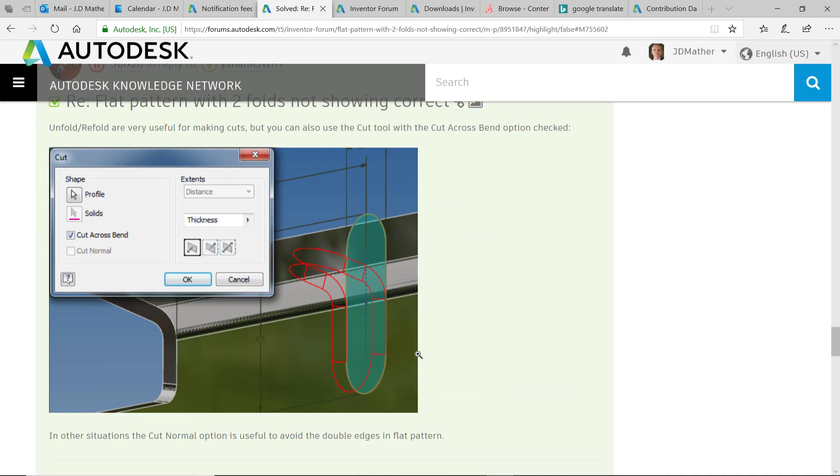In this video, a customer reports a problem with a flat pattern not showing correctly. I'll go through and analyze the geometry and suggest perhaps a better technique for doing this.

So here is the original part file. I'm going to go and look at the first sketch. And I see from the first sketch that it was started out as a flat part and then folded up.

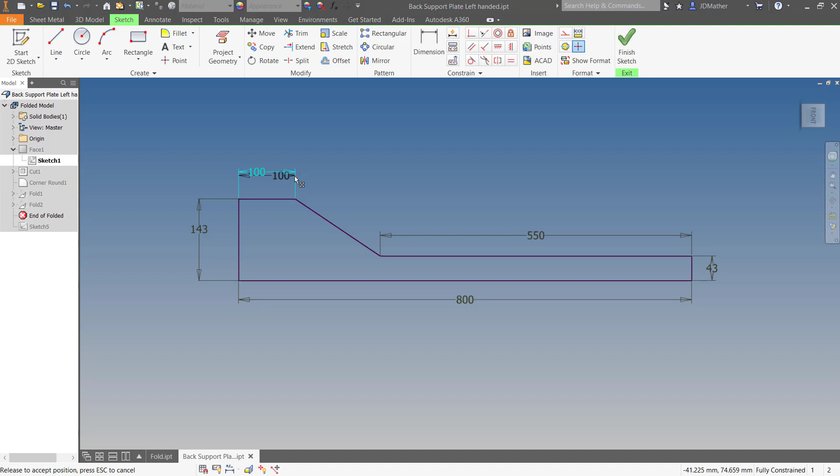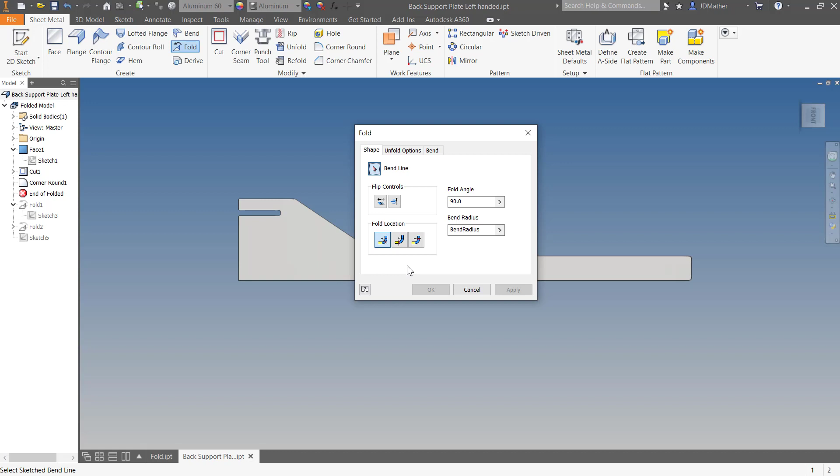I'm going to suggest that any time a beginner is tempted to use the fold command, the dialog box should actually come up and say, are you sure you want to do this? Have you checked with an expert to make sure that this is the best way to do it? Fold should be very, very rarely used. There are some cases where you would use fold, but I would say it should be a very rare occurrence

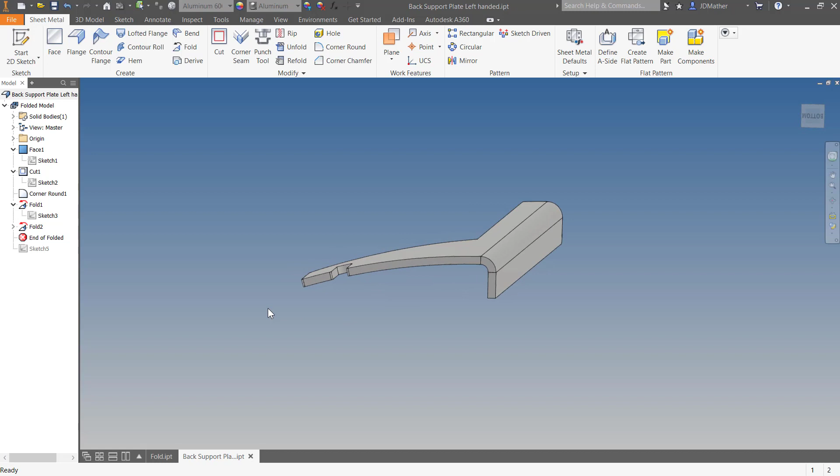And so this was folded 90 degrees, and then this was folded with some arc radius, which we'll look at in a minute. And then I created a sketch on the end of this part, and we'll look at that sketch.

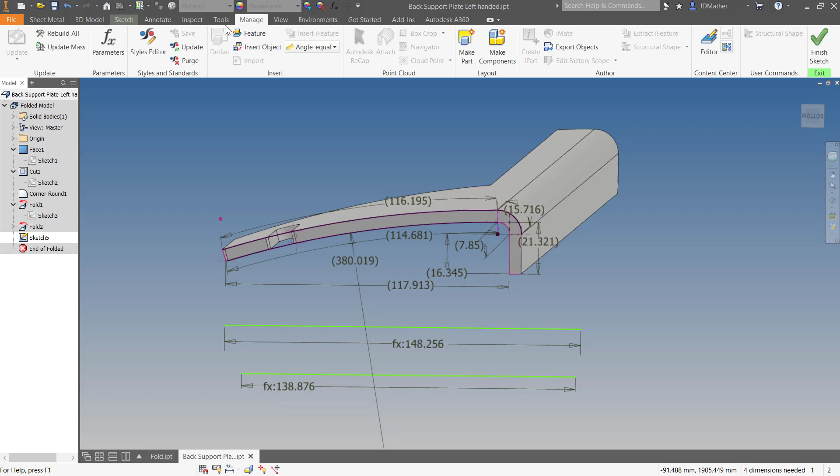So let's increase the number of decimal places out. I'm going to go to the Manage tab, or Tools, go to Document Settings, go to Units, and increase the number of units way out. We might do that on angles too.

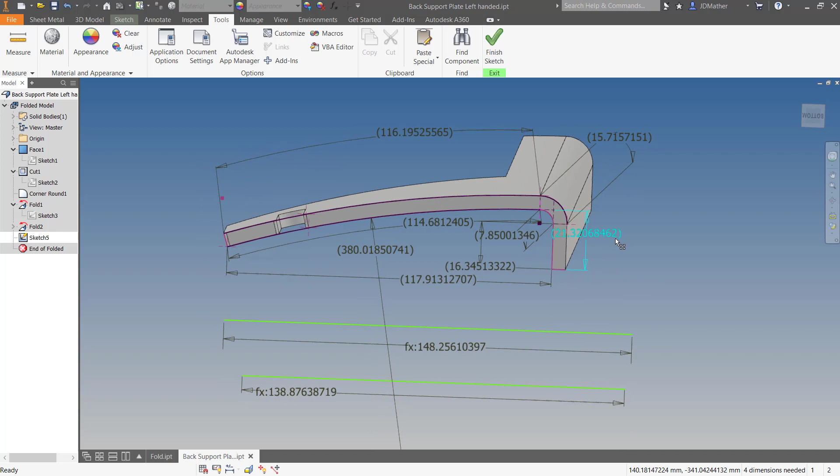If I look at these numbers, if I'm working in inspection and I have to start inspecting this part, none of these numbers make logical sense to me.

Now sometimes what I'll do is I'll check in both inch units and metric units to see if maybe it's just a matter of conversion from metric to, or from inch to metric.

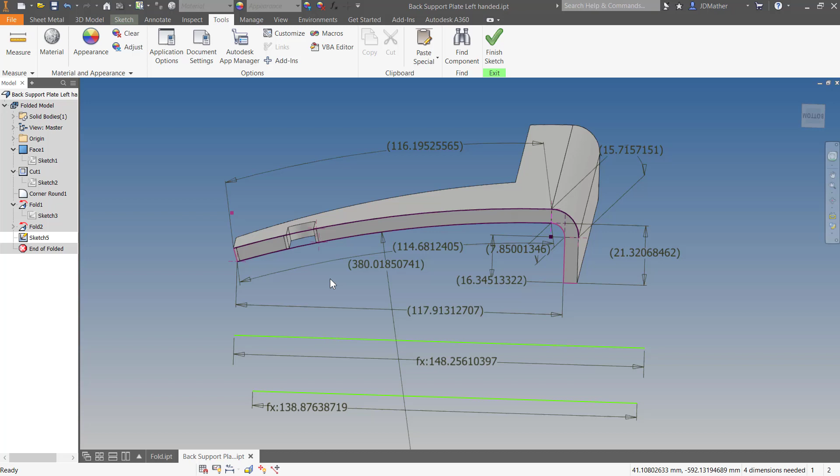But for the height of this vertical piece right here, is the design specification, would the inspector inspect it from here to here, or from here up to the implied intersection of this line and this line, or this arc and this line, up to here? So where is it inspected to?

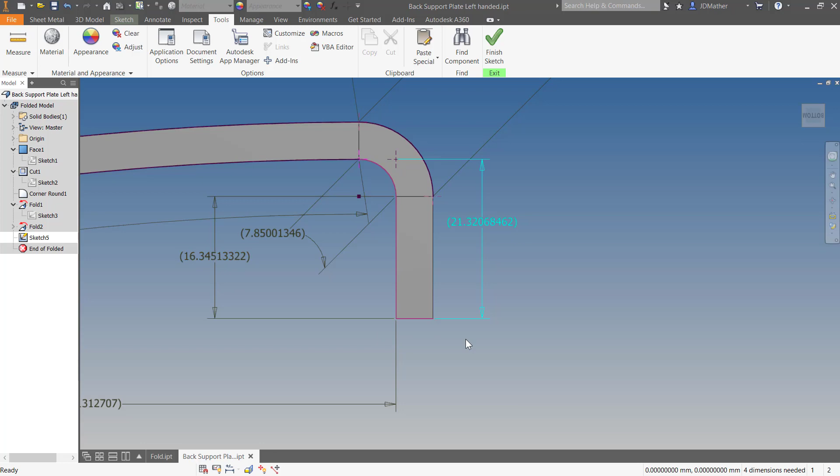Now what is the critical dimension? I don't think you can manufacture something out to 8 decimal places, so I would expect it to be something like 16.34 or 16.35 instead of going all the way out here like this.

And then I would expect that this point right here was dimensioned from here, or over here, or this point up here, or the midpoint here, something over here to tell me where this curve should end. And I wouldn't expect it to be a really oddball, strange number like that.

Now the original part was something like 143 millimeters wide. I took, let's just double click on this. So I added up the arc length of this dimension. Actually, I think this one is up here.

The arc length of this dimension, arc length of that dimension, and then this height from here to here, and I get 148. So that's the length of the curve along there.

And then I did the same thing on the inside of the curve. So the 143 would be somewhere in between here and here along there. But how do you inspect that? And what purpose does it serve? You want this thing to fit in an assembly.

So let's look at how I might model this part. I'm going to start a new sketch. Let's see which plane that was on. If I rotate around, I'm...

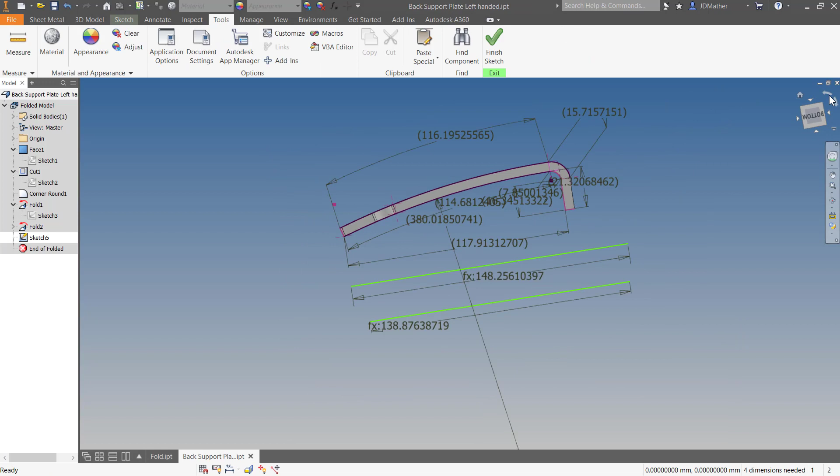going to go to the bottom view, and I'll put that, let me check, I'm checking to see where the origin planes are. So I'll go to the bottom view and I'll start on the XZ plane.

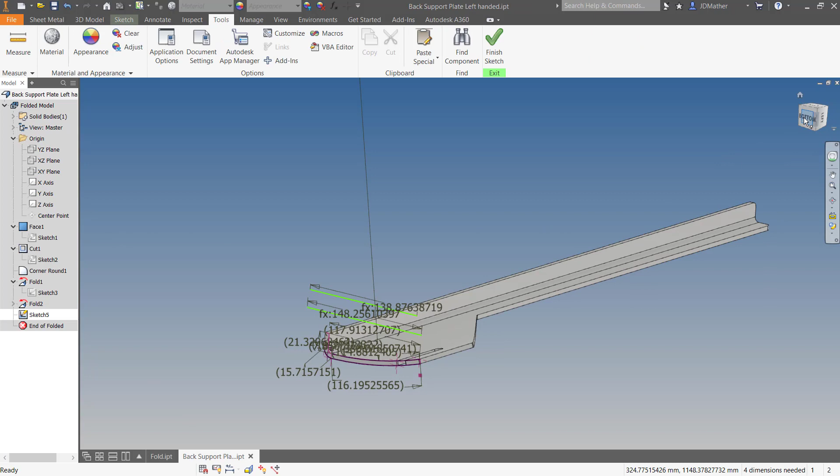Alright, so let's go to bottom view, upside down, I think that was. Actually, I'm going to turn it, it'll be easier for me to work if I do it upside down like that, the way I looked at it originally, and I'm going to go around like that. Alright, so I will do the XZ plane.

And I'm going to draw a line going straight up. And then I like to dimension that line immediately for a sense of scale.

Now I'm not sure which one of these dimensions to use, so I'm going to use this one, and I'm going to round that up to 21.3. It can be edited later as needed. So I'll dimension this as 21.3.

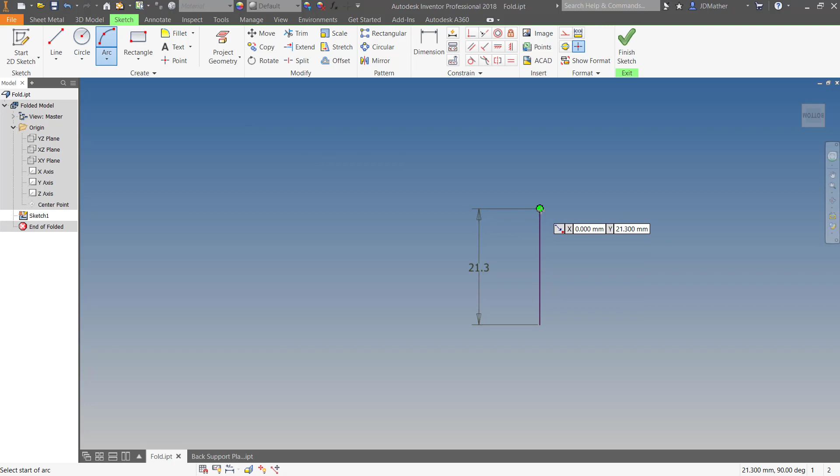And then I'm going to do a 3-point arc, and I'm going to do that arc from here over to here, something like that. And I'll dimension that arc. I'm going to round that, I'll do that as 380, and then I'm going to do this 118 from here over. So 380 and 118.

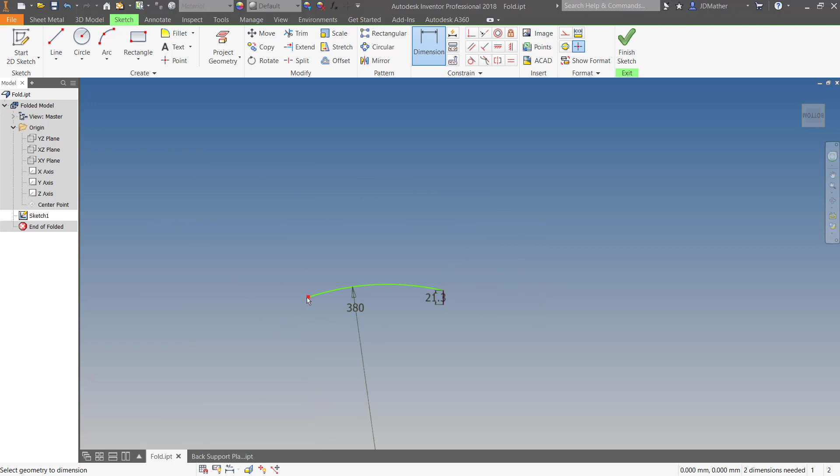So I'll dimension this as 380. And the distance from here over to here as 118.

Now I need to dimension one more location, either the center of this arc or the vertical height of this point. I think I'll do the vertical height of that point.

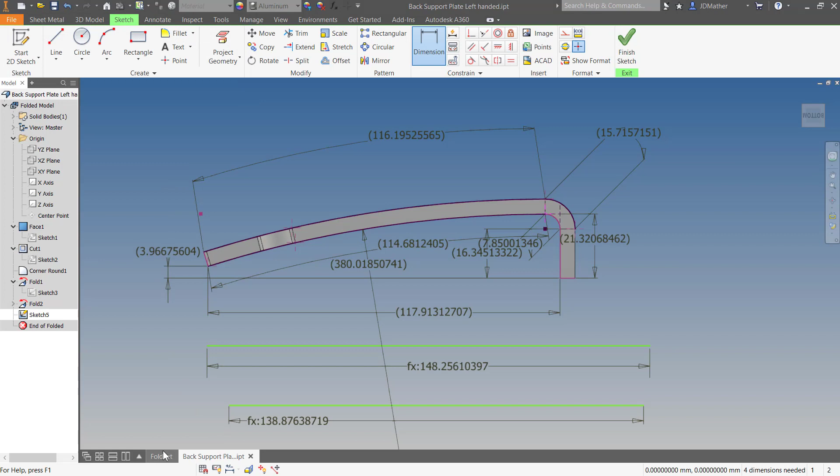And so let's go back here, and I'll dimension the distance from here to here, and I'm going to call that 4 millimeters. So dimension from here to here, that vertical height is 4 millimeters. Now notice when I put in that dimension, everything is fully constrained.

All right, I've already set up my sheet metal rules, so I have 5 millimeters set in as my thickness, and that will be the inside bend radius across here.

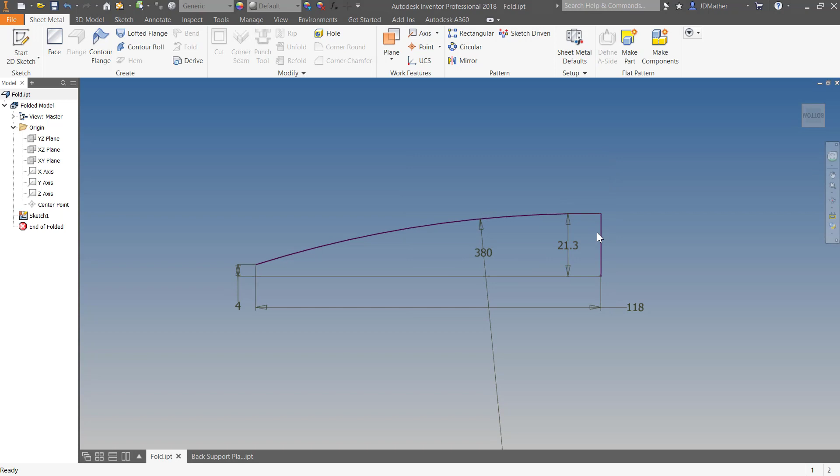And so let's go ahead, and I'm going to create a contour flange. Notice it's going to put the bend in there for me, the 5 millimeter inside radius, and the distance I want to go on this then is 800.

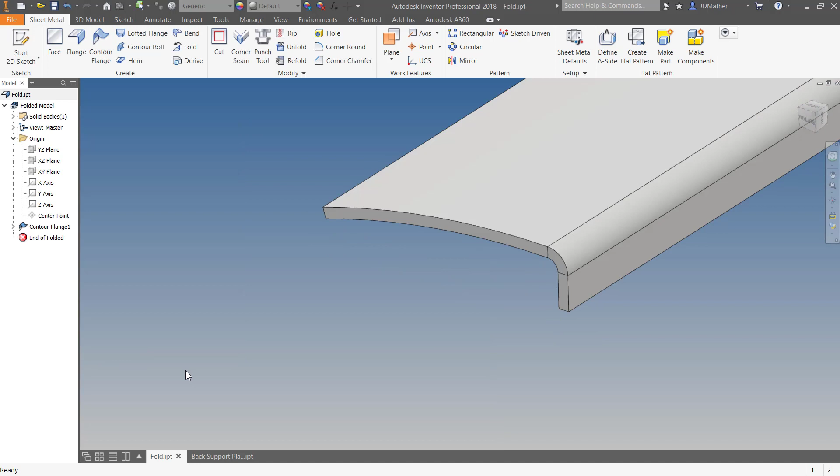Okay, so there's my piece of stock that I'm starting from. Now I've got two different ways of putting the cuts on here. I'm going to give you an idea of the first way, and then I'm going to do it a second way. I could do unfold.

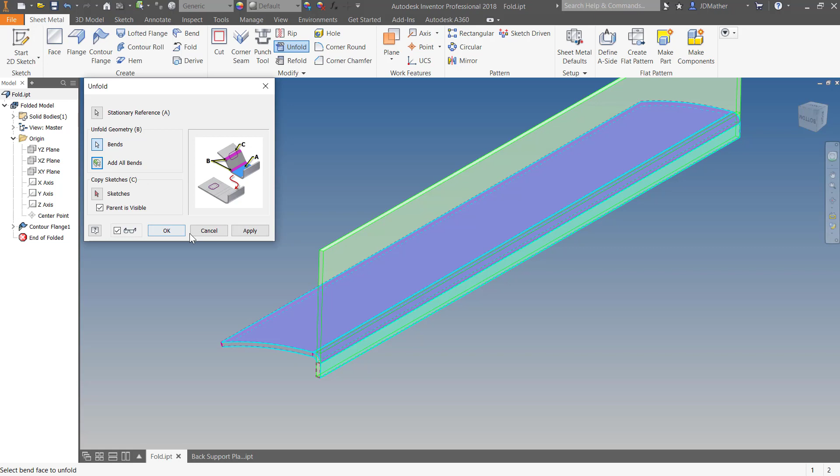I'll select this face, tell it to add all bends, and say OK to that, do my cuts on here, and then click refold to fold that back up. Now unfold refold is different than doing fold or doing create flat pattern.

Again, I would suggest that you almost never ever use the fold command. You'll end up with results that really can't be inspected. They're probably not what you intended.

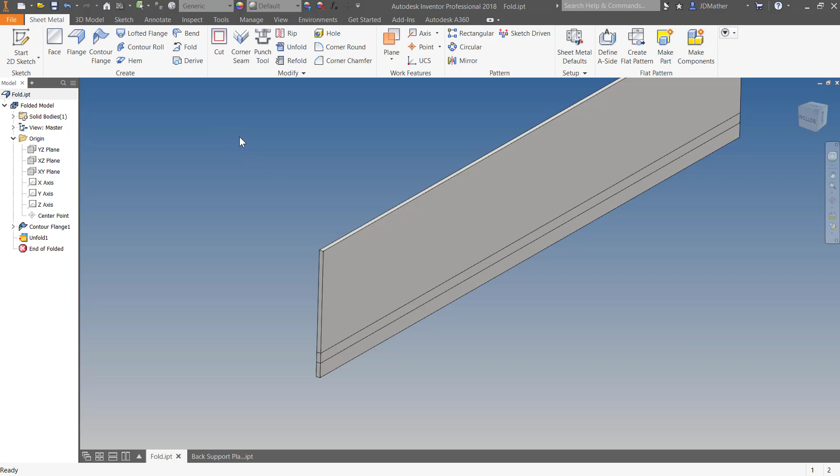I'm just going to undo that, and I'm going to show you a separate way. Now this works because I have a flat face here. If I didn't have the flat face, I might have to do it differently.

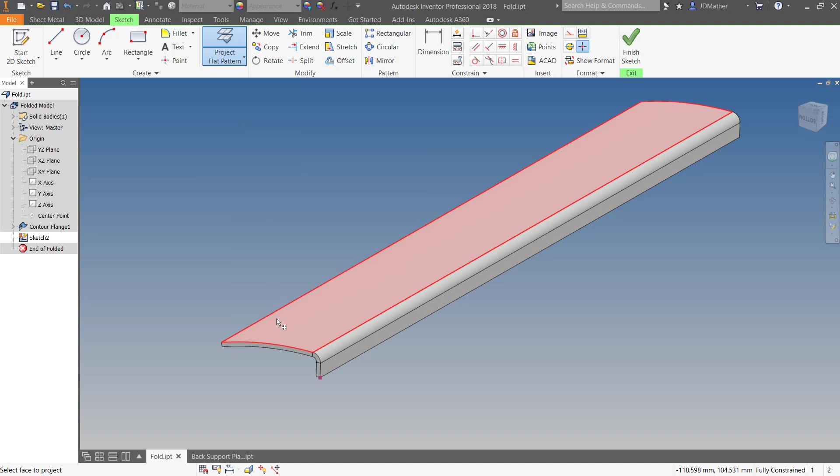I'm going to click on that face, tell it to do a new sketch, and then tell it to project flat pattern onto that sketch. So I'll do project flat pattern, and select the furthest most face out here. I'll select this face. It projects that as though it was flattened out.

And then I can do my sketch of the geometry that I want to cut away on this. So I didn't have to flatten the part out. I could just flatten the sketch out to do this.

Now I prefer to change all this geometry to construction. You may or may not need to do that, you probably don't, but I just prefer to.

And then I'm going to do a slot, over here. Now be careful if there's any midpoints here, you don't want to snap to a midpoint. I'm going to put that slot over here about like that.

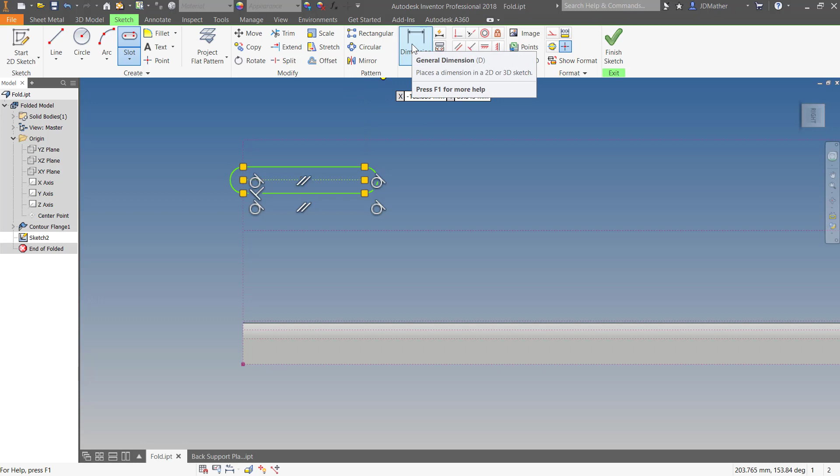Now I'm going to put the dimensions on here. So from here to here is supposed to be 10. And then from this edge to this edge on the original sketch, it was given as 19.5.

Now I might dimension this to the center of the slot, but that's the way it was given on the original, so that's the way I'll dimension it.

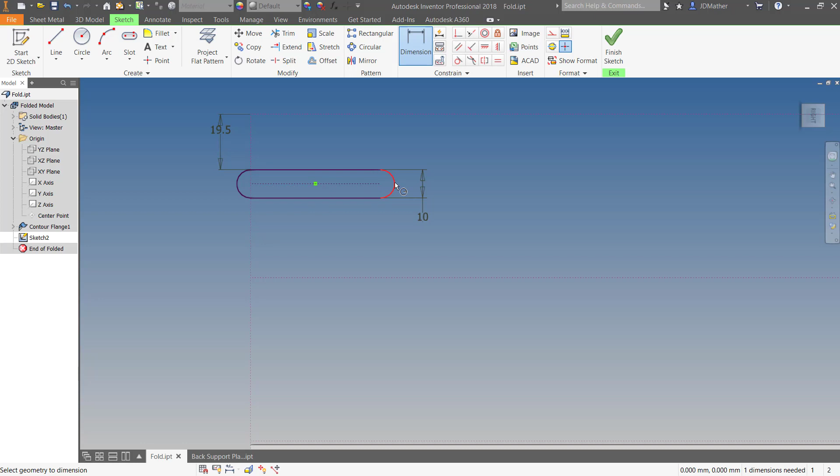And then this distance was given, and actually it was given the dimension to over here, not to here. I would probably dimension it differently, but I need to put a point here to dimension it the way it was on the original.

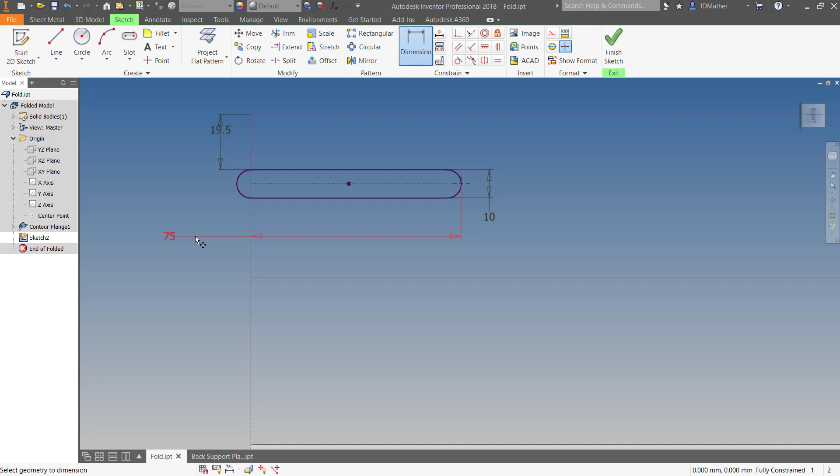Okay, so I'll dimension from this point over to here, and that distance is 75. Okay, so I've got that portion done.

And then I'm going to cut some of it out over here, so I'm going to draw a line from about right here. I'll come down over to here, over to here, and back over the top of this.

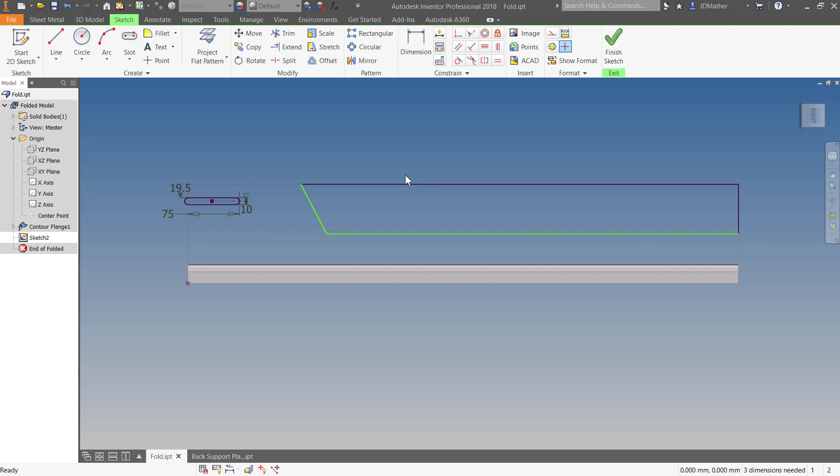Now it didn't really need to change this line and this line to construction, but I just prefer to do that in case I make a change that would cause those two lines to go sick, so my entire sketch doesn't go sick.

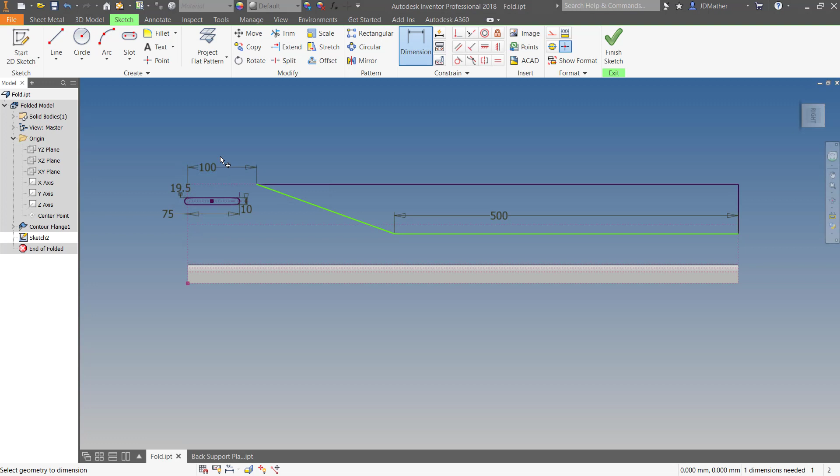I'm going to dimension this distance as 500. I will dimension the distance from here to here as 100, and I'll dimension the distance from here down to here as 43.

Okay, so now my sketch is fully defined. Now I would really kind of question this 43 dimension.

Normally I prefer to take all my dimensions from the same datum, so I'd probably dimension from this line right here as the datum. And notice if I do that, what is the critical dimension?

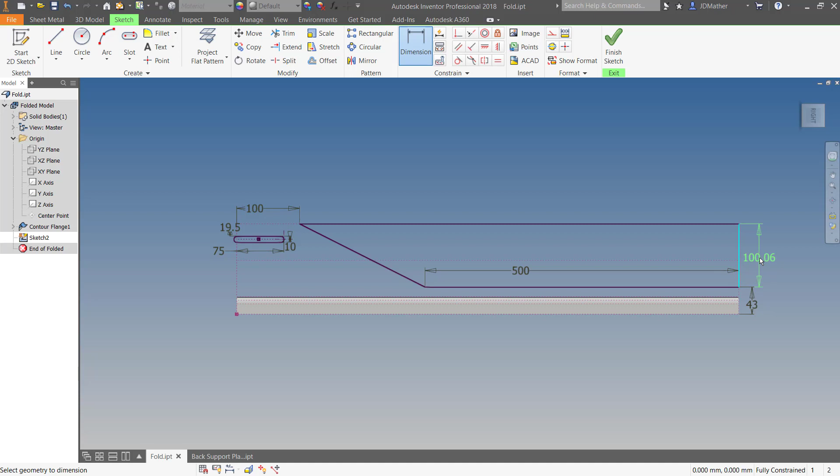Because this is going to get folded over, is the critical dimension from here, which notice there's some bend allowance in here, or is it from over here?

You've got to be really careful about selecting your datums, but this is the information I'm given in the original, so this is what I've got to work with.

Also, if I dimension this, the overall width, bend allowance is taken into consideration, so it isn't exactly 143. You've got to consider your bend allowance, or let Inventor take care of your bend allowance.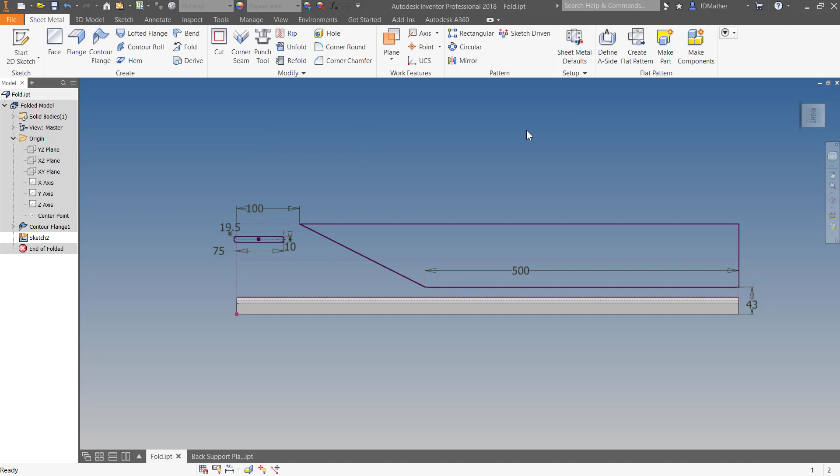All right, I'll finish that sketch, and then I'll do cut, and I want to cut out this area, and I want to cut out this area, but I don't want to just cut going this way. There isn't anything there, so I'm going to tell it to cut across the bend, and it wraps that around the bend.

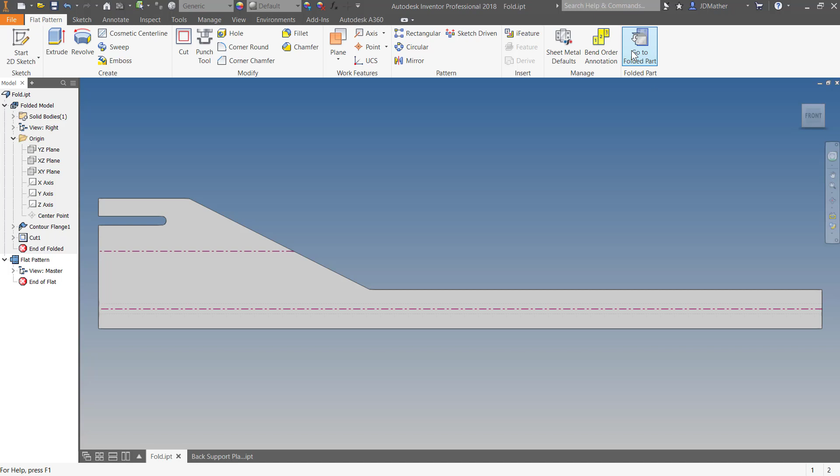I'll cut that away, and there's my finished part. And if I then go to create flat pattern, there is my flat pattern that includes the calculation of bend allowance. So again, I would very, very rarely use this fold command.